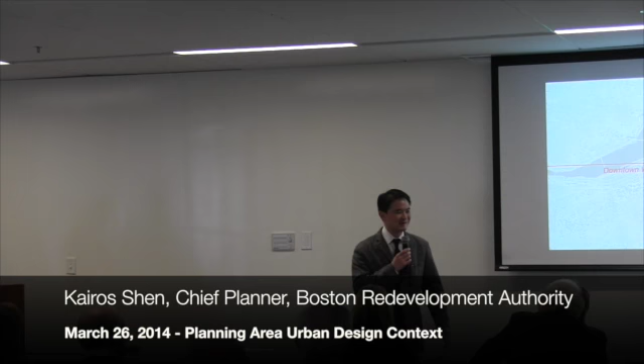Is that all right? So anyway, thank you for allowing me to come this afternoon to speak to you. I think Rich and Chris thought that my role today would be to put some larger planning context around the work of the municipal harbor plans as it pertains to this particular area. I apologize if it's going to be very broad, but I think it's important to understand the broad context, and then I'm going to delve down into some more specific building context.

So with the first, why don't we go to the first one? I was actually here for a presentation yesterday morning, and I started with the same slide. Since it's opening day in about, on the 4th, which is almost exactly a week away, I wanted to start with a comparison with New York City, because we're the world champions right now.

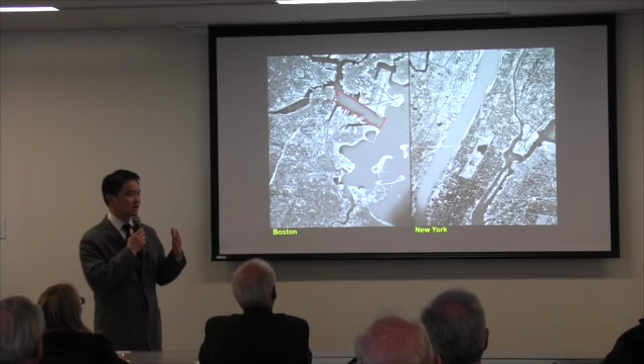Can you go back again? This is really part of the last 40 years of planning in the city of Boston, about cleaning the harbor. Can you go back a slide? Basically, this rectangle is almost exactly the same rectangle as the 900 acres for Central Park. Those of you who know New York City understand how important Central Park is to the civic and recreational life of the city.

Now, there are many people here who have spent much of their career helping us clean up the harbor. That was one of the most important planning challenges and achievements of the last generation, or even continues to this generation. Those of us doing planning in the city now are inheriting this legacy of a much cleaner harbor that yet needs to be further cleaned.

Not to point out other people, there are many in this room who are instrumental in that. But the point about municipal harbor planning and harbor planning in general in the city of Boston is to try to reclaim the inner harbor to become the kind of civic and recreational resource that Central Park is to New York City.

The inner harbor should be the same for Boston. It just so happens, by the way, it's not doctored, these are the exact same scale. Wow. Next.

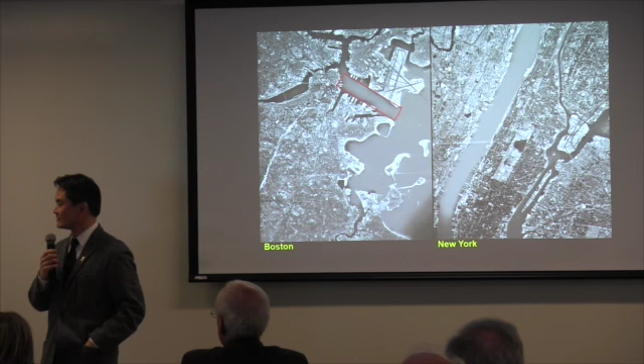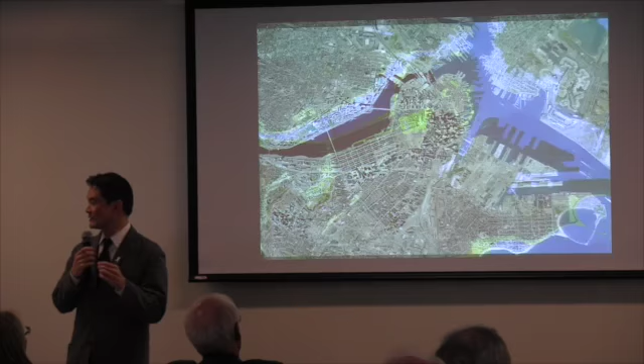There we go. So another one, this is an aerial photograph of the city. Of course, the other most important planning endeavor we've been working on has been the submersion of the I-93 corridor through the city. If we can get to the next slide, you'll see what's needed—oh, I forgot, we should have probably copied it onto the hard drive.

So this shows the 27 acres of the reclaimed surface of the old highway. It is a linear park, and part of the challenge we've been working on is to actually connect the inner core, the traditional financial district, out across the greenway and connect it to the harbor.

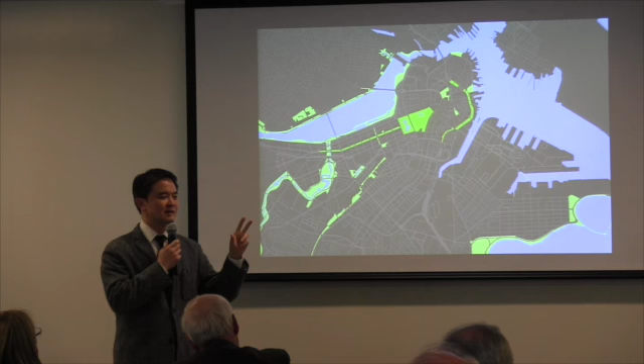So to me, the one-two punch, if you want to think about the last generation of planning, was the cleaning of the harbor and the submersion of the highway, because once you get the harbor clean, then you want to make it accessible.

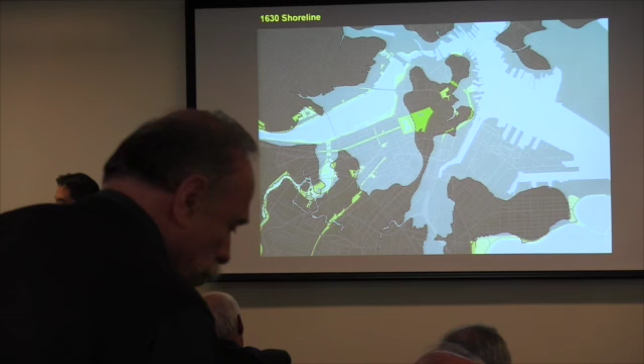Maybe we should do that. Maybe it might be much easier to just copy it onto our hard drive, because the animation—well, it's not working.

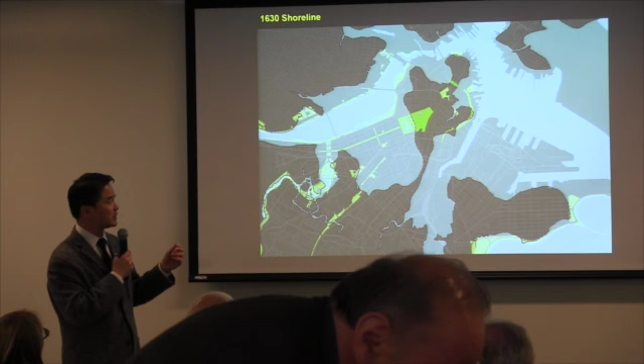This shows you the 1630 shoreline, the original Shawmut Peninsula, and the central artery and where the harbor is. Of course, the harbor—I think maybe we had an inferiority complex because we filled in the harbor to gain the 900-acre inner harbor to compare ourselves to New York City. I don't know. But this is another important context, because much of the challenge in the planning area that you will be asked to make recommendations on is essentially in filled tidelands.

And of course, much of the greenway itself, as you can see, is also overfilled tidelands.

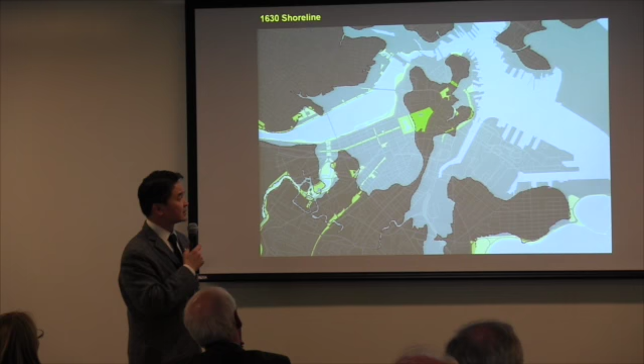This is the kind of connections that we want to see. You see the continuous harbor walk, which provides public access to that recreational resource, the inner harbor. And then the other bright green lines are the Crossroads project that the city has been working on, which are lateral connections across the greenway, connecting neighborhoods that had previously been disconnected from the water back to the water's edge and across the greenway.

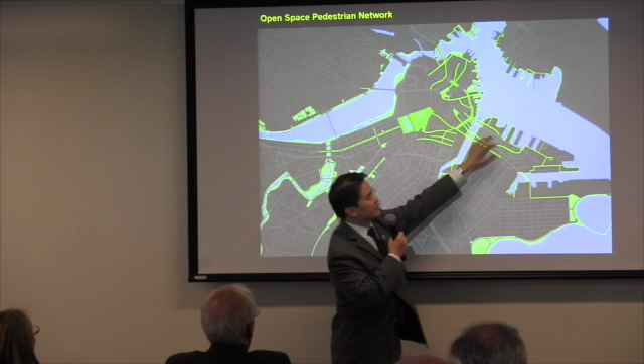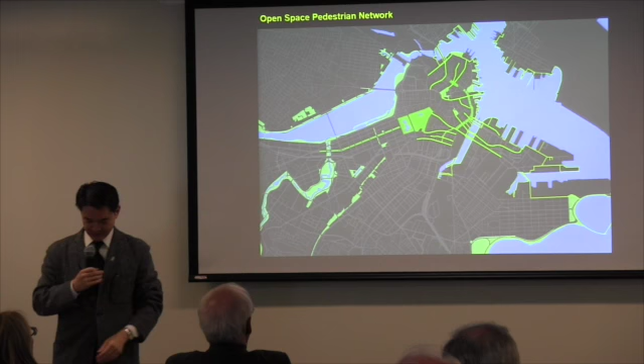So essentially this expands the area of influence and impact of the greenway, as well as the impact area of the waterfront. The notion is that the boundary between the water and the land is expanded, the territory between the tips of the wharfs and the greenway and the buildings beyond. The planning challenge is to expand that so more properties and more users benefit from being near the water and near the parks.

I wanted to show this because part of this is to try to understand the historic context of the transformation of the waterfront. These two images show aerial photographs that I will return to, which are more contemporary later. But you can see at the turn of the century—and by the way, one of the most important projects that this governor has been pursuing is the expansion of the South Station rails.

Right around 1900, probably 1920s, you can see that the train station went all the way to Dorchester Avenue without the cut of the highway. Then this was probably the late 1950s, when you begin to see the highway separating the financial district from the derelict buildings along the old wharfs. This is where Rowes Wharf is today. And then new developments like the Harbor Tower under construction were really ways to try to reclaim the waterfront.

And of course, at that time, the BRA was working on its first harbor park planning, which was defining the opportunities along the water and how the city could actually begin to reach out beyond the highway.

Now, this is not exactly our planning area—it's towards the lower part of this—but one of the things I wanted to show was the impact of such a major intervention. In a way, the boldness with which the planners approached building a city highway is the kind of thing we can't do and don't dare to do anymore, because the kinds of disruptions a highway brings to the city are quite dramatic.

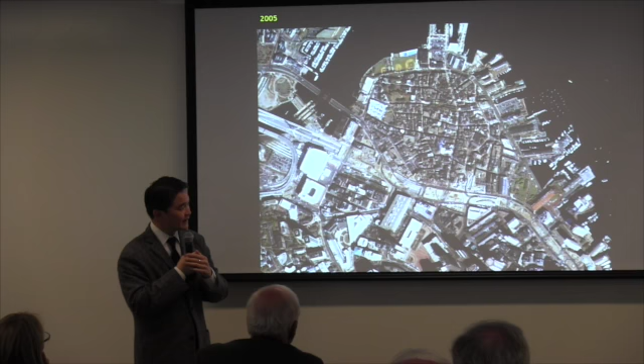And then as you can see, the south and north surface arteries emerging and defining the areas of the park. You will recall that the 2000 plan called for 75% open space, and then certain parcels, like the Bulfinch Triangle, were defined as building parcels. The plan also called for civic institutions to be built over the ramps in order to generate special nodes of activity to activate the greenway.

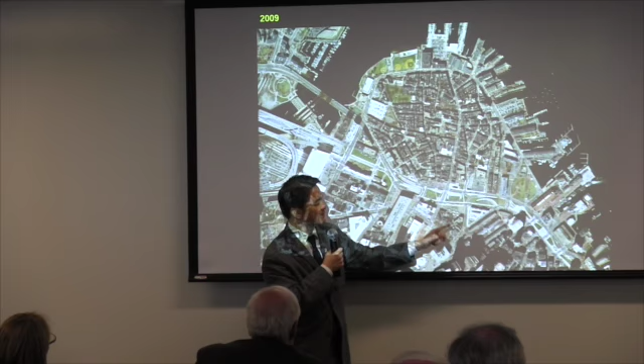And then you can see, I think this is the last one—one more. You can see the emergence and reestablishment of the cross streets being more clear. And then, of course, those of you who were part of the Greenway district planning process helped us create a set of guidelines around the area defined by the highway itself for redevelopment, such as the government center garage and the Broad Street area.

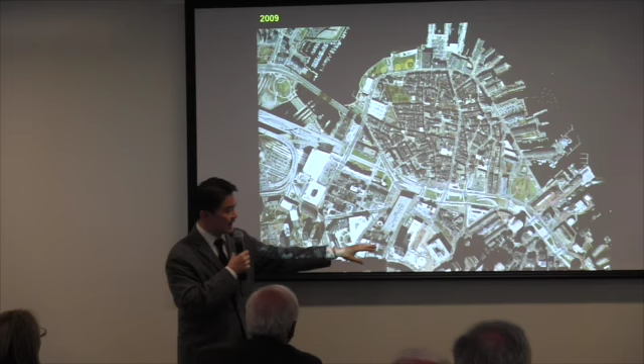Next, so this is some of the historic transformation. And you can see that, if anything, what this series of slides teaches us is that in the last 50 years we have suffered through a lot. And in a way, the resiliency of the neighborhoods has been quite dramatic. I think many of you who worked through the Central Artery project couldn't imagine what it was going to be like on the other side of this, but now that we're on the other side, we can't imagine what it was like before.

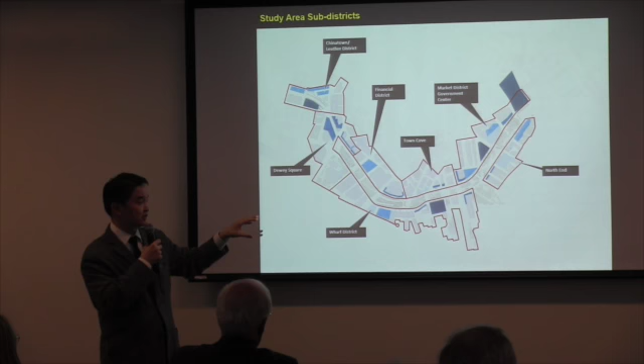Now, we spent a lot of time talking about the Wharf District and came up with some very specific guidelines. But I think that at that time, everybody recognized that this was an important step, which is to overlay now the perspective from looking from the water side in, as opposed to from the parks looking out.

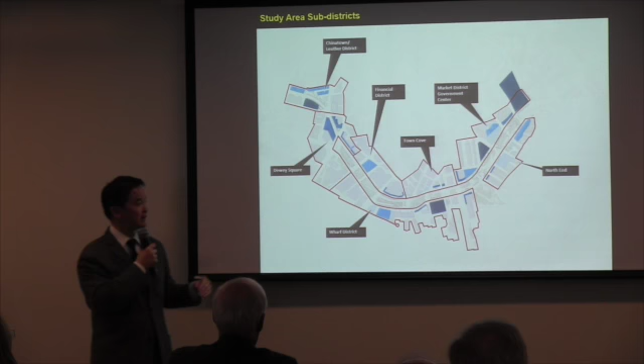Next. And there, we talked about the four-legged stool, which is to analyze the impact of the development impacts of each of these parcels from four particular perspectives. These are actually, we should get Matt, because he was one of the consultants that helped us produce this. So one is program and use.

There's a recognition that it's very important that we have the right kinds of uses, especially at the ground level, to actually figure out how we activate the Greenway parks. The other one is, of course, the design itself, the building form. And then, of course, there's the issue of economics, which is how do you rationalize the redevelopment of these parcels, and how important it is, or how do we begin to think about the economics of feasibility. And then the fourth one is the environmental impact.

Next. I think these are going to be, so obviously the work that Utile did started to talk about how the cross streets as well as the fronting streets of the Greenway parks actually had to be part of the equation of thinking about activation and access.

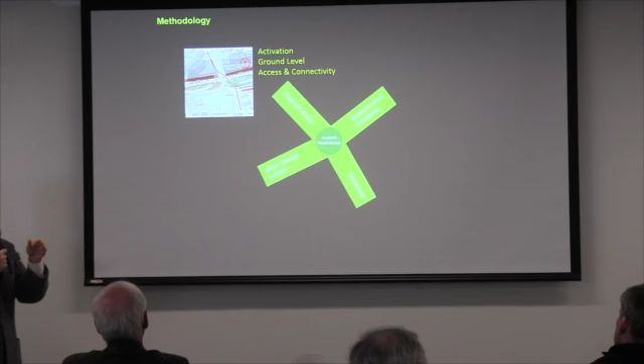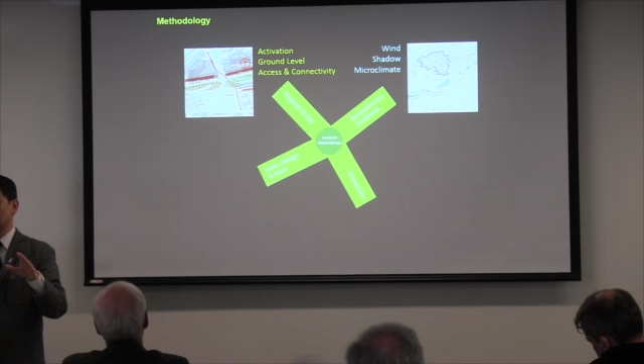We learned that the microclimate created by each of these buildings in the environment around it was very important. Rich and I just walked over from City Hall, and I think we were blown in multiple directions. And on a day like today, there is absolutely no way you could actually use the public spaces if the wind and condition wasn't favorable.

Next. And then, of course, there's this notion about rationalizing the heights. Now, I already talked about how much variety there is in terms of the district, that you could find height references. But the question isn't so much whether you can find a reference to justify the height that you were suggesting, but to understand how that height begins to relate to all of the other things that we talked about.

And in the municipal harbor planning process, the relationships within this, and this might as well be the intersecting portion of a Venn diagram, that I think the state, because the state's issue about access and about protecting the public's right in this area that is close to the water, is all about ensuring its public accessibility and usability. And then finally, and this might be the most controversial part of our study, was that our argument was that it was not necessarily the right thing to look at.

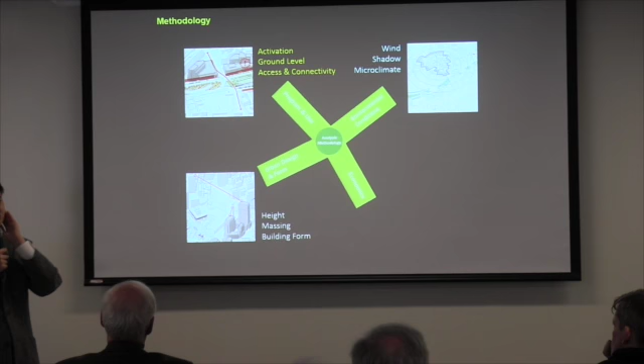Next slide. To look at today's current feasibility, because one of the things that's happened with the Central Artery and the creation of the Greenway parks was that the state and the federal government have invested billions of dollars into this new open space and highway system, and that we needed to actually allow the value generated by that investment to have a chance to actually accrue before we figure out what is actually feasible.

Because that's not a traditional and typical way of looking at the economics of the project. Now, I'm not going to dwell on that, except to try to remind folks that these same principles that we use for the Greenway study are the same as what we are asking you to help us with in this part of the municipal harbor planning process as it pertains to this area. In fact, it becomes more complex because, as I said, it's not just about the impacts on the parks, it's about the impact on the water side and on the watersheet itself.

This is the earlier map showing the 1630 shoreline boundaries. The yellow and red show different degrees of storm surge - red is lower storm surge, yellow is greater. If Sandy had hit us, the general consensus is that the surge would have been somewhere between yellow and red, which means almost the entire planning area is vulnerable to climate change.

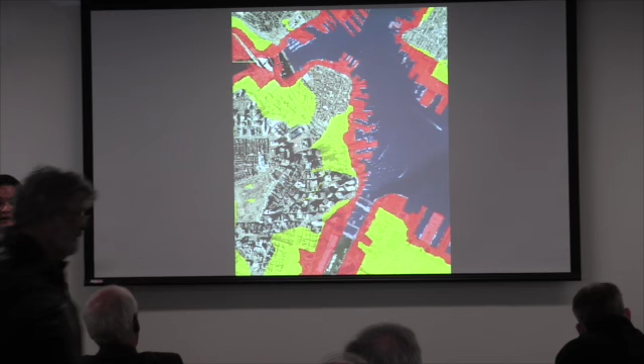One of the things we're asking our consultants to work on is how to incorporate climate change and resiliency as part of the criteria for evaluating offsets proposed in this planning area. Some of this rightly belongs in the public realm, and other parts are really about the building owner being smart in redevelopment. This is an area we've been working on in the city to become more proactive - we've adopted a protocol for climate change, which is that whenever a developer...

I've run out of time. Going on too long is one of my faults, so I'm going to try to finish.

The current Chapter 91 does not explicitly recognize climate change as one of the criteria, and I think we have a chance to break new ground here, to think about how climate change and resiliency can be incorporated as one of the offsets, so there may be an option to look at different building approaches on certain sites if there was a significant contribution to resiliency for this area.

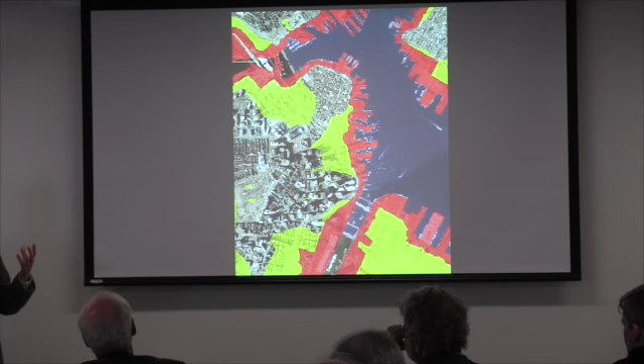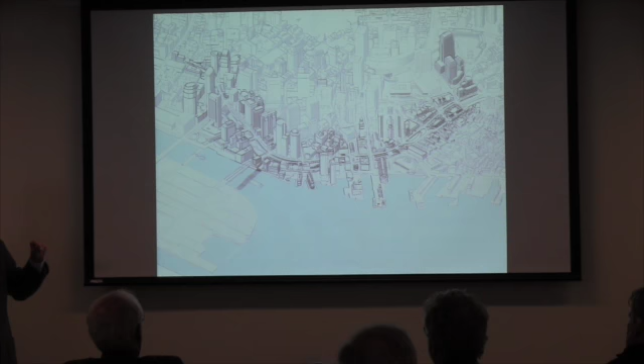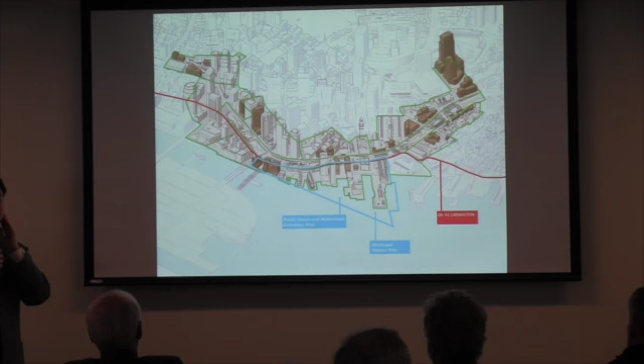I want to end with two particular examples outside of our planning area that the state has approved in the past downtown. The first one is the Intercontinental Hotel.

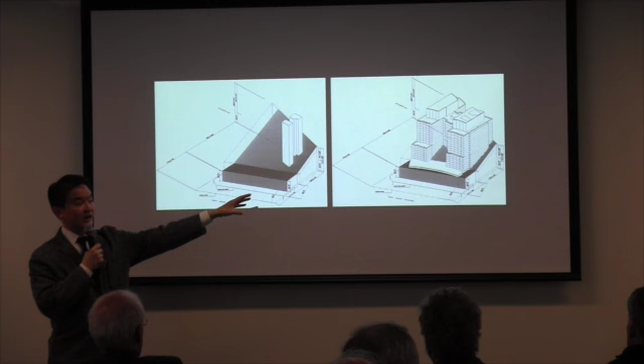This was a site owned by the state where the ventilation towers were, and this trapezoid - this three-dimensional trapezoid - is the conceptual line of the Chapter 91 building envelope. We were able to convince, through the planning and municipal harbor planning process, and an extensive set of offsets, to actually build the Intercontinental Hotel, which is about 362 feet at the back.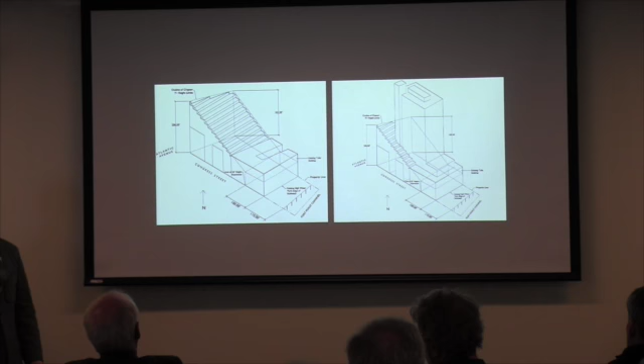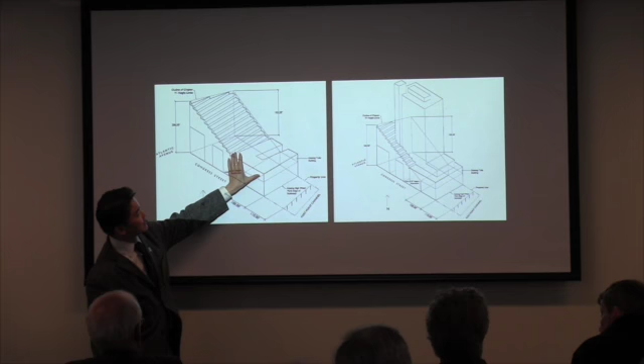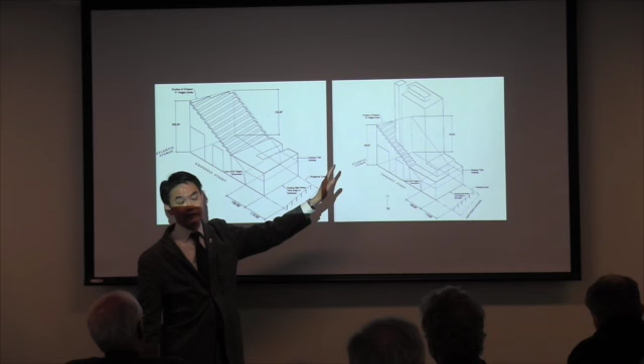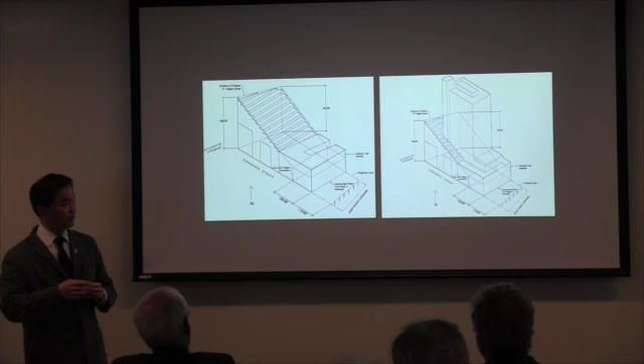This is Russia Wharf, now Atlantic Wharf, on the water side of the channel. These are the historic wharf buildings, and the ziggurat goes back towards the Greenway. In this case, we were able to convince the state to allow for a 382-foot tower, not built out for the site, but with significant contributions to the public realm and access to the water, and in some cases significant contributions to water transportation.

The last image is just to - I unfortunately have to take my daughter to the doctor, but I'm here, I want to take some questions. I hope this truncated presentation of some of the urban design and planning context will be helpful to you as you begin the study in earnest.

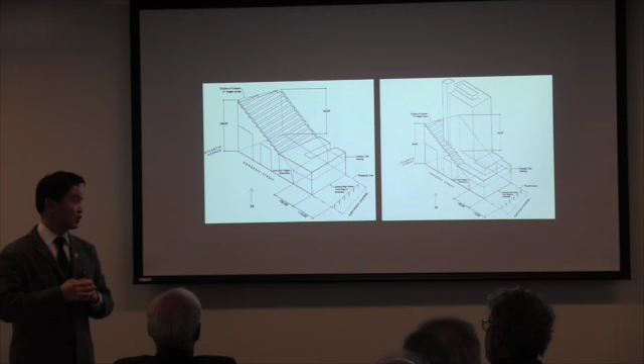The next one just gives you an image of the planning area in context - this is a very contemporary, recent photograph. I believe there is a very viable municipal harbor plan here that could be very creative, in the sense that we are looking for new ideas to introduce and infuse this notion of offsets and benefits for the municipal harbor plan.

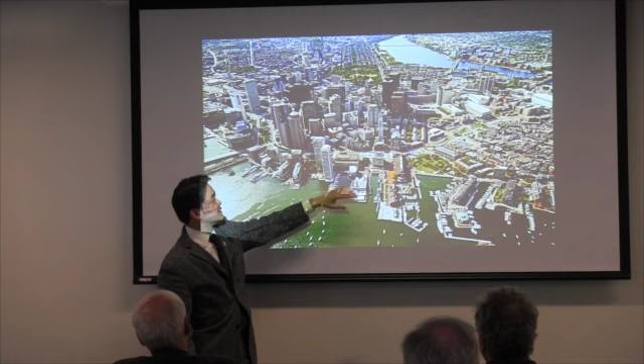But we also realize that there are important sites that need to be renewed. Obviously, everybody talks about the harbor garage, but clearly the Marriott, Long Wharf Marriott, and some other buildings could become parcels of redevelopment, things we should also consider. The goal, as Rich and Chris have said over and over, is not to be so prescriptive that there's only one solution, but prescriptive enough to identify the areas where we expect creativity from the development community, and opportunities for the advocacy community to come together and make some of these parcels redevelopable over the term this municipal harbor plan is adopted for. So that concludes my remarks.

I'm happy to take questions. Any questions from the advisory committee first?

That was really helpful to set that in context. The two examples you showed, one can clearly see the trade-off made between stepping a building back, allowing it to go up, and doing other offsets in water transportation. But neither of those projects achieved much in the way of opening up visual or pedestrian access, in the way one of your diagrams showed we want to try to achieve. So is there an inherent conflict there?

I don't think there's an inherent conflict. In that particular case, both buildings are actually fairly narrow to the water. The distance between the existing cross streets was actually not that far away. And in both cases there were interior pedestrian connections required as part of the permits. Some of this interior connection, while described, was not part of the official offset. And I think in both cases there was sufficient room in the site to create at least 30% or 35% open space.

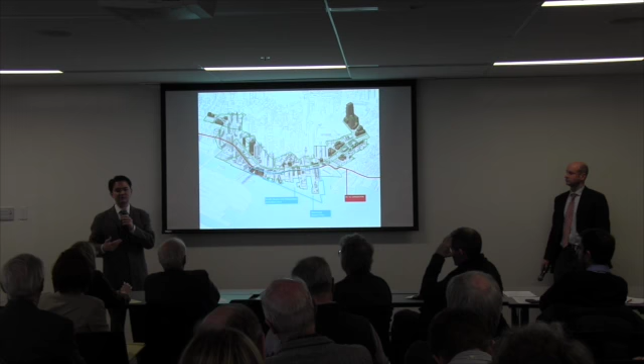Now, I just want to be clear, we also talked about the Intercontinental and Russia Wharf, or Atlantic Wharf, and I told the mayor, just so you understand the order of magnitude of offsets that have been approved by the state, these are the two closest examples. So I think that, of course, in the short time we had with each other, I wasn't able to explain the intricacy, and Vivian will tell you that most of the time I just know enough to sort of fool my way or bluff my way through it.

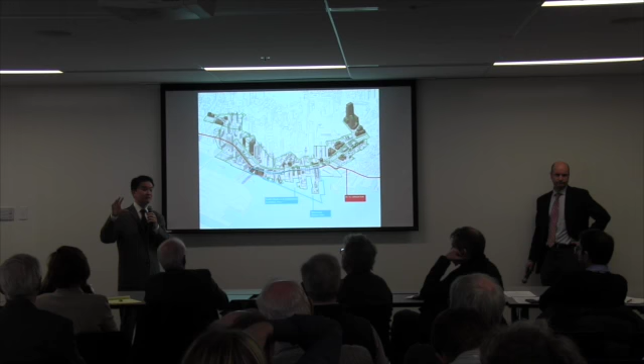But I think the mayor's smart enough to know that there's a lot of content behind what we are doing right now that he needs to review, as he and his staff form his policy around this. So I want to say that he's measured and interested in this process, and he wants input and creative thinking, but he also wants a viable municipal harbor plan that the state can endorse, one that gives clear direction for redevelopment in this area, so that we don't have to do very specific approvals or exceptions particular to one site, but instead create a menu that developers can look at for guidance, and the state can then matriculate with its individual licenses. And then we will adopt the zoning that's consistent with that municipal harbor plan, offsets, and guidelines that we come up with together.

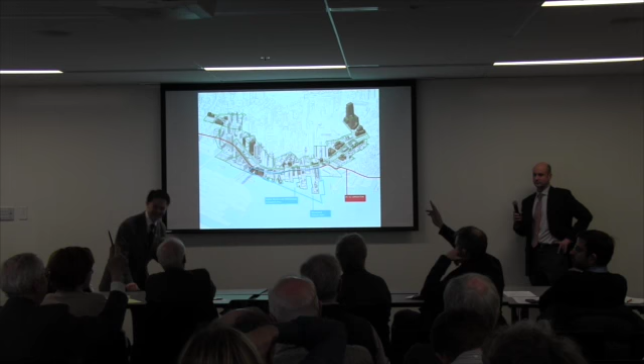Is there no other questions? Oh, it's not a question. One of the comments I thought I would make.

I think it would be encouraging for the BRA to think broadly about how you define adjacency of open space and the resources available. Because if you look out farther into the outer harbor, you've got the largest open space in the entire harbor available to you in the harbor islands.

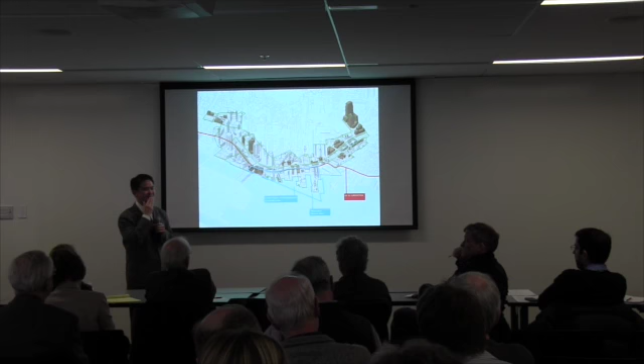Right, and access to those islands through Long Wharf and downtown. If we can find ways to make those transportation connections, make it easier to get out there, make it affordable, we can really create a larger extension of open space that is connected to this neighborhood.

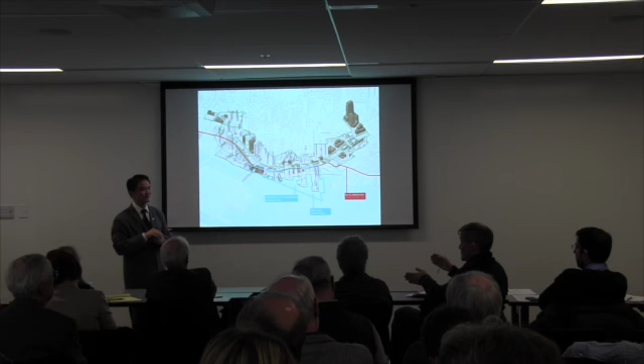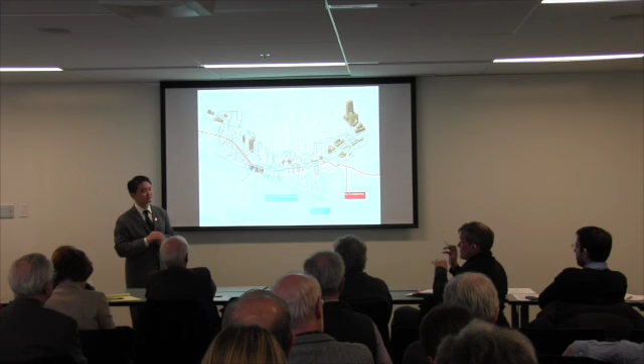Yes, with a wonderful resource. It's larger than Central Park, when you get out to all those islands and count what's out there. The opportunity of defining adjacency to open space, connection to open space, and your ability to get out there, incorporating what you do when you think about what's happening in this neighborhood, to expand that definition, I think provides a lot of opportunity for creativity.

Yeah, thank you very much. I actually edited the slide that had the harbor islands, but you're absolutely right. And my daughter thinks that the beach is literally there. This last summer we were out almost every weekend when we were in town, and it's a tremendous resource. But the question about...

So in our minds, the subsidies or the contributions that the development teams actually contribute to making that, shortening that distance, making it more accessible, making it more affordable, and all of that are real substantive. So we don't want to underestimate that.

And I think the point about the harbor is that, even though it's on water, it can have a tremendous positive impact on the recreational life of the city. I feel like we have an open space that has more potential than Central Park, you might argue. But I don't want to get into an argument with the New Yorkers. We are still champions of the world.

I just want to make a quick comment. I think it would be helpful when you're looking at this to put the FAR of each building along the municipal harbor plan area, because it's very distinct when you do that. They're about half the FARs of what's on the other side of the greenway.